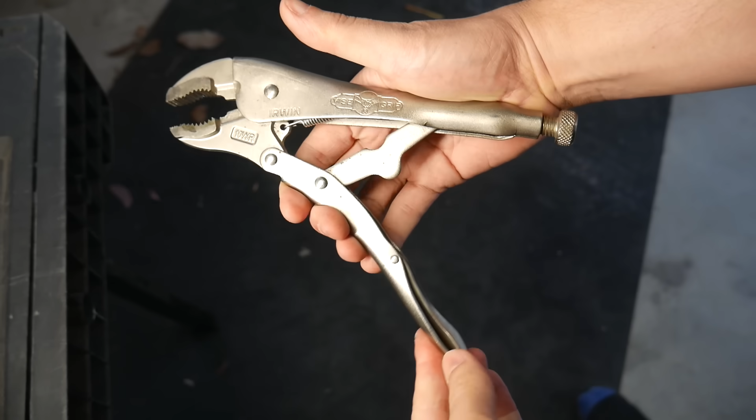I believe that there's one mechanism to rule them all. It's found everywhere in common objects, and today I'm going to show you how you can use it in your own designs to make them better.

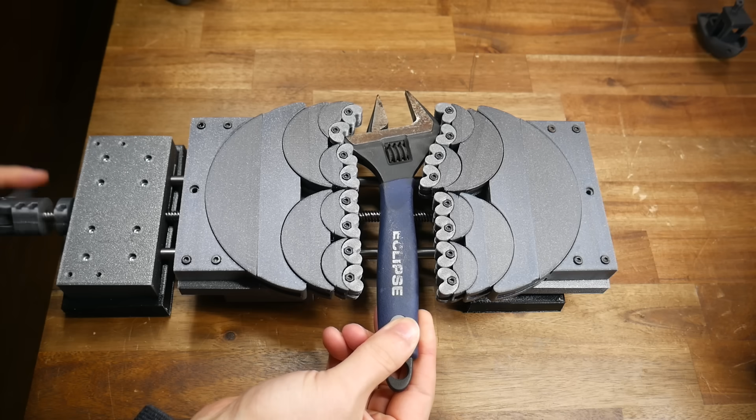Designing and making your own mechanisms can be incredibly satisfying, but understandably, some people might find the process a little too complicated. So today the focus is on designing just one, the over-center mechanism.

We'll look at real-world applications and then work through a series of designed examples so you can learn the critical characteristics. You might not realize it, but over-center mechanisms are all around us in everyday objects.

The most common use you'll probably see are those satisfying snap-to-close latches that hold tool cases shut. But you'll also find over-center at the heart of more complicated mechanisms like Vise-Grips.

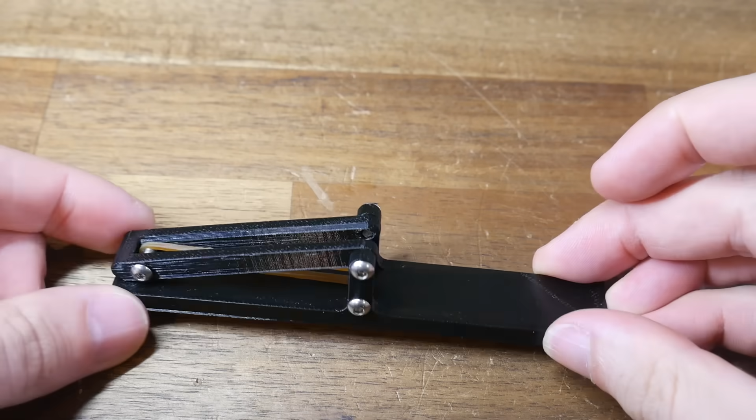To break down exactly how an over-center mechanism works, I've created this very simple version. And like those toolbox latches, this is very satisfying to play with as it snaps into position.

Let's examine the geometry. What you're seeing here is the simplest form of over-center mechanism that I could design. And like the real-world object, you can see that we can animate it and take it through its range of motion. Any of these mechanisms will have three main points that we pivot around, and the relationship between them is what's important here.

For two of these points, the lengths will be the same through the full range of motion. For instance, the highlighted line between this top and bottom pivot point is always going to be 12 millimeters. And the distance between this top and side pivot point is always going to be 45 millimeters.

But the distance between the final two points is going to be variable, and that is the key. We can see in this position it's a little bit over 44 millimeters. But as I start to lift it out of that position, it lengthens to 54.

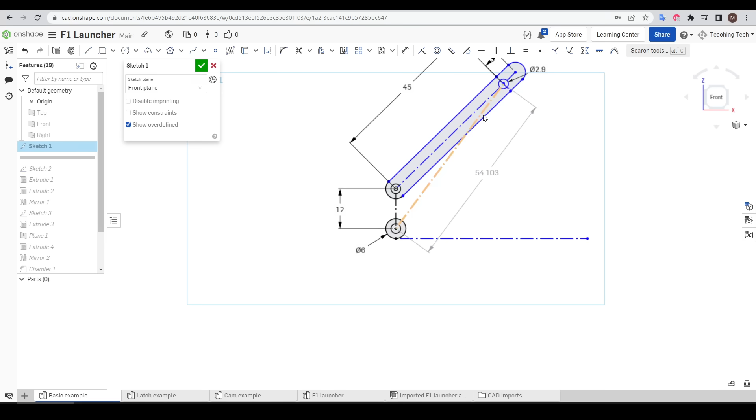At the top it lengthens further to 57, and then as it comes over the other side, we can see it's getting shorter at 55. And then as we bring it down, it gets shorter still, ending up around 44 again.

In real life, if we represent this length with a rubber band or a spring, we can see that as we lift the arm, the rubber band or spring is stretching, is at its highest tension at the top, and therefore if we let it fall at either side, it will want to contract and pull the arm down and lock it into position. And that's the crux of the over-center mechanism.

In the middle of its range of motion, there's a lot of tension or resistance, and the mechanism wants to pull to either side. Despite the name, the mechanism never wants to rest over the center of the movement. In fact, resistance increases as we approach that center point, and that's what makes it so effective as a latch.

It constantly wants to pull itself shut, and we can use these characteristics to our advantage to create very secure locking mechanisms. This is pretty satisfying to play with, and it would probably work well as a switch. But it's still quite simple, so now let's look at a more practical application.

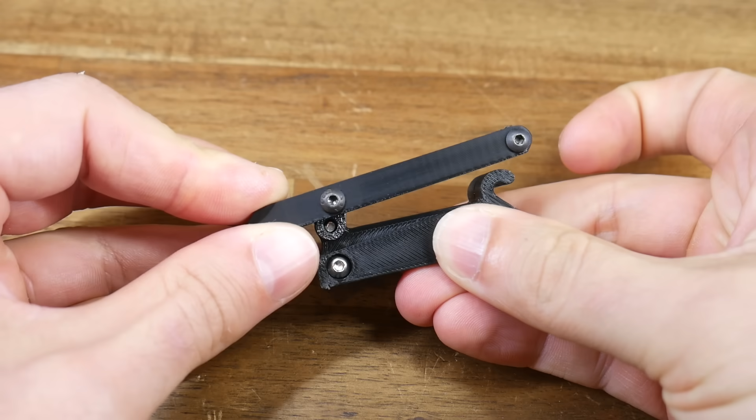Let's move on to an actual locking clasp that you could use to hold two halves of something together. Let's have a look inside the CAD of this example, and once again we have 3 pivot points.

The distance between these 2 upper points will always be the same. The distance between these 2 close points will also always be the same. But this third distance between the 2 furthest apart pivot points is once again going to vary as this arm swings around.

In this lowered position, our latch should remain locked in place, because as soon as we straighten this, we reach the position of most tension, and that's our over-center point.

But if we flip it up far enough, we'll lose tension, and the latch should come free and be able to swing out of this hook to open.

We flesh out the design to make it 3D printable without support, and once it's assembled, we're ready to demonstrate. Keep in mind you would have the hook on a separate part, whereas here I have it all in one piece just to make it easier to display.

In our simple example, the arm that would vary in length was created using a rubber band, which is designed to be elastic without breaking. Therefore, we could print it from any material we wanted as there was minimal stress on the plastic.

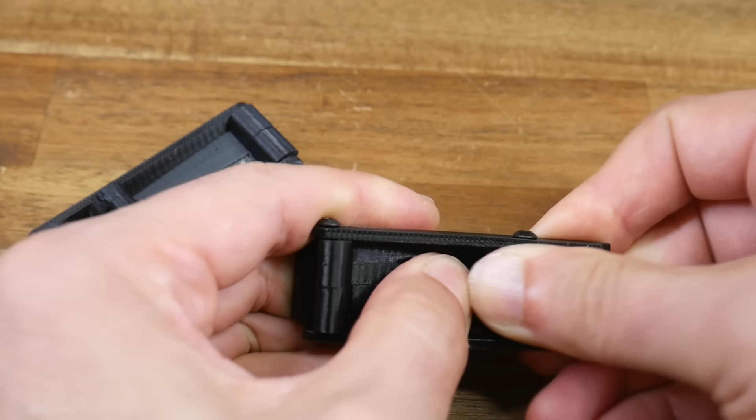This latch example is made from all solid parts, no springs or rubber bands. I printed it in PETG as well as PLA. The PLA version does work, but it's quite a stiff material, and honestly it feels like it's going to break if I use it too many times. Whereas the PETG version has a little more inherent flex, and this tiny bit of elasticity gives it a very tactile motion. If you're designing an over-center mechanism without rubber bands or springs, I recommend PETG.

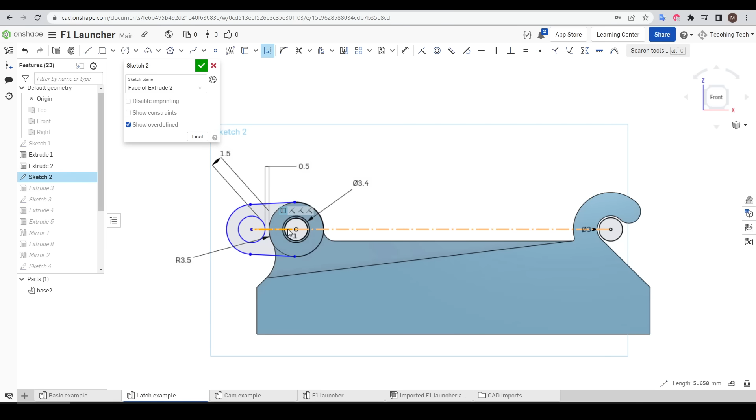Another thing you can do to prevent your printed mechanism from breaking is to keep the distance between the two closest pivot points as short as possible. In its relaxed position we're just under 45mm, but as we move it over center we're just over 45mm, so the plastic component between these two parts doesn't have to stretch very much.

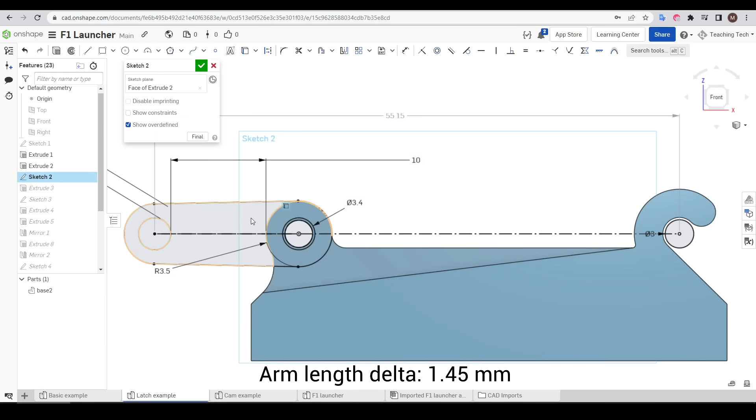Now for fun, let's exaggerate this gap. We can see that at the bottom we're just under 54, and over center we're just over 55. So the more spread out these pivot points are, the more this arm will have to stretch, and the more chance you have of breakage. But if this arm is represented by a spring or rubber band, you can safely ignore this consideration.

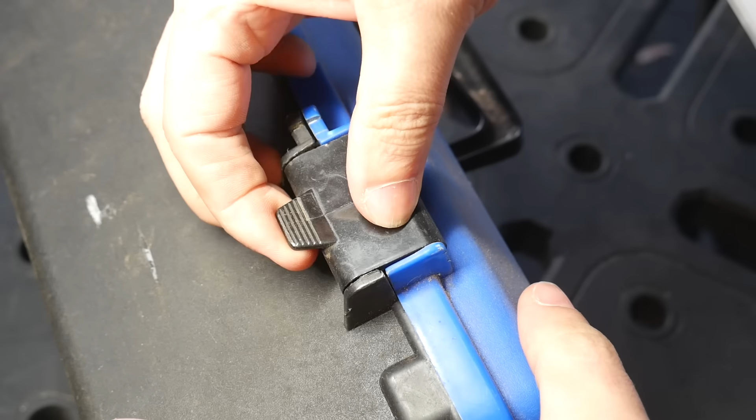Let's recreate another real-world example of a closing latch that wouldn't typically be called over center. In our example so far, as we've traveled over center, we've increased the length and therefore tension in the mechanism. But on this example we instead have compression. We still have an over center point with a lot of pressure, but either side of that point, the latch is happy to snap into position.

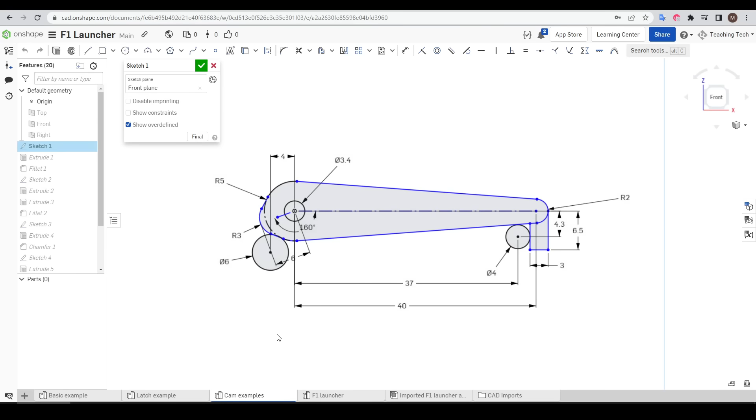There's a couple of ways to achieve this, and the first version uses a cam, which is this raised lobe jutting out on an otherwise circular end. Like our other examples, we still have 3 points, so let's move the sketch and see how this operates.

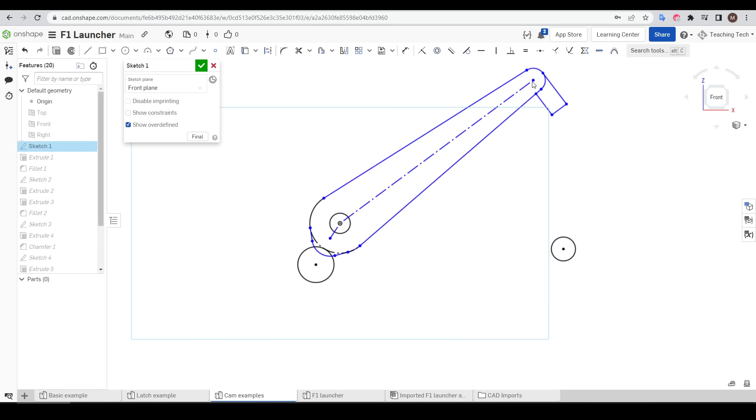At the moment we're relaxed, but as we rotate up, we can see that the cam overlaps with one of the pivot points, adding compression. This position will have the greatest amount of pressure, but either side of that, the mechanism will want to snap to where it can move more freely.

The trouble is, our plastic is solid, therefore I put a little cutout here, hoping it will flex inwards and stop the plastic from breaking. I modeled up a quick base and then hit print, and here is the mechanism assembled.

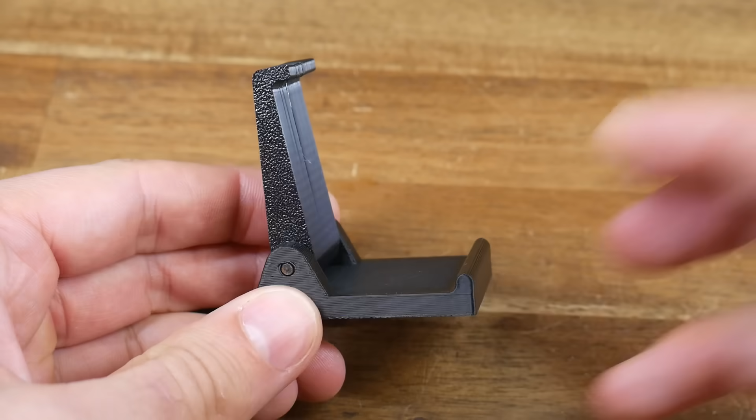We can move freely, but as we push and approach the over center point where the cam is rubbing on the base, pressure builds up until we pass over center and it snaps into position, although it's still a little bit loose for my liking.

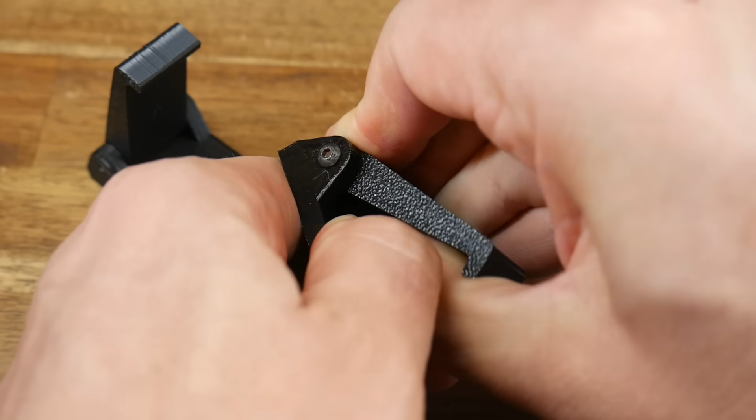That version was in PETG. I also tested this one in PLA, and once again it's much stiffer. So if your mechanism has a cam that adds compression, I wouldn't recommend PLA but rather PETG, as it has more inherent flex.

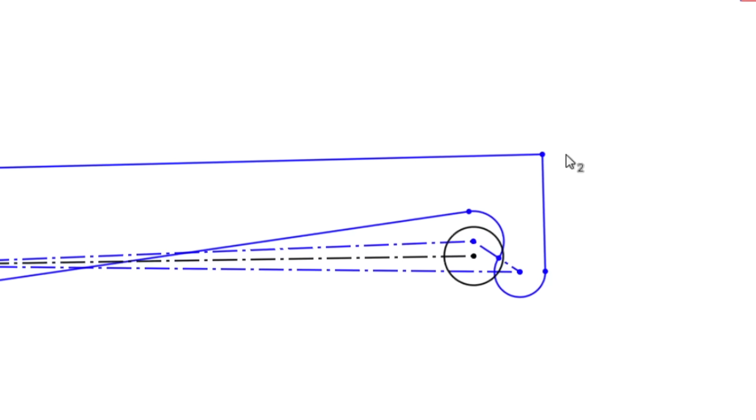As we rotate the arm, we can see that once again we'll have compression between these two pieces. Realistically, this elbow is going to flex to create a larger angle. Maximum pressure will be at the center point, but either side of that, the arm will want to snap to create clearance, whether that's opening upwards, or if we're closing the latch, snapping down to secure everything in place. So similar to an over center mechanism, just not quite the same.

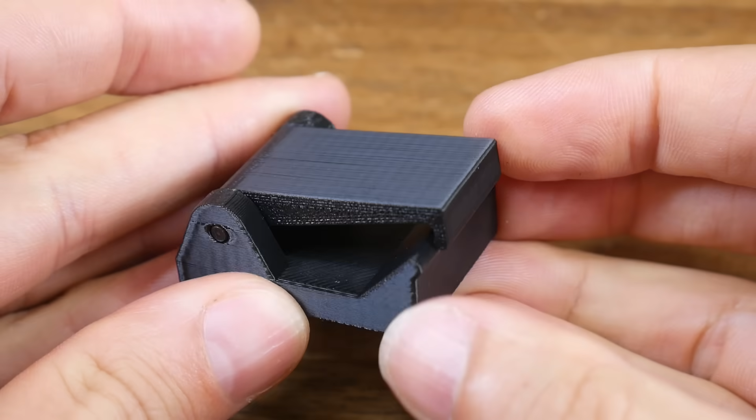And here is our latest latch, printed in PETG and working perfectly. In fact, this one makes a satisfying clicking sound as it snaps into position. Because of the way this latch flexes, it feels like over center, in that there's a high friction point in the middle and then it wants to slip either side. And because this flexing happens over a long distance, I found that PETG or PLA was perfectly suitable for this type of design.

We have some functional designs, but let's finish with a proper project where the key element was an over center mechanism. This is a box of soda bulbs. They're actually carbon dioxide canisters, and I'm sure they're great for making soft drink, but I've never used them for that. Instead, I've used them for rocket propulsion, such as the sequence you see in the intro of my videos, but more significantly in F1 in Schools competition that we had a lot of success with when I was still teaching.

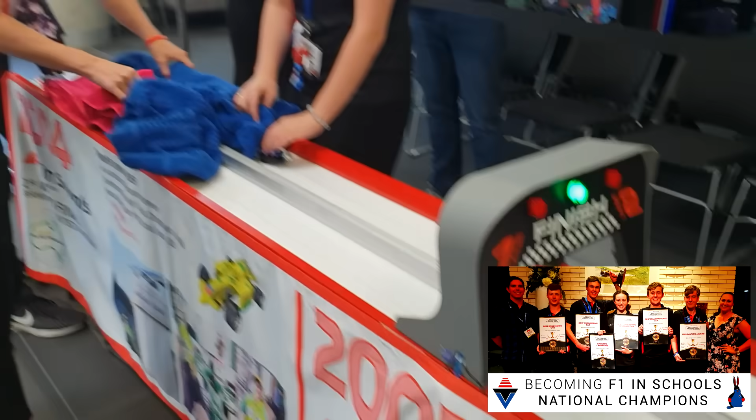To test the cars at school, you need your own track and launch system, but they are so expensive. So I did what many of you would do, and I designed my own from scratch, track and starting system.

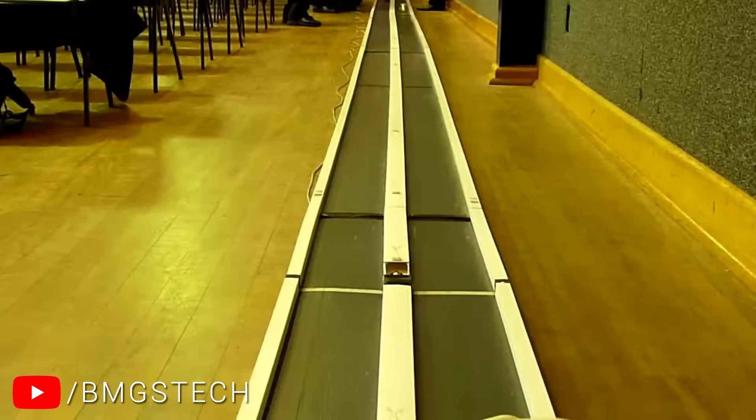Originally, I made the mistake of thinking that the canisters were easy to burst and thought I would employ a solenoid to do just that. But it turned out that the membrane on the back is surprisingly tough, and any attempts to break it with something like a thumbtack will either break the thumbtack or maybe break your fingers.

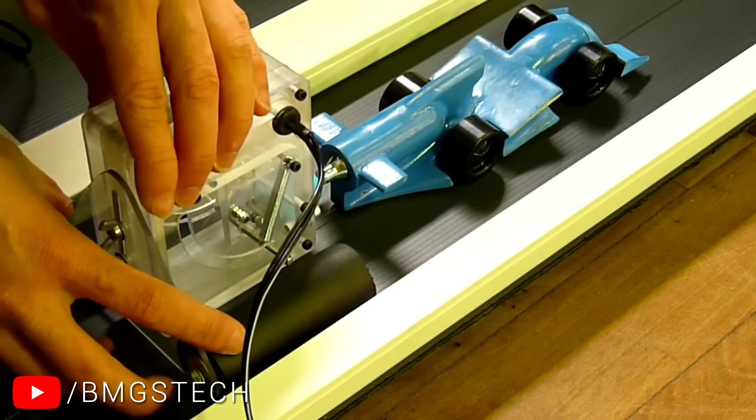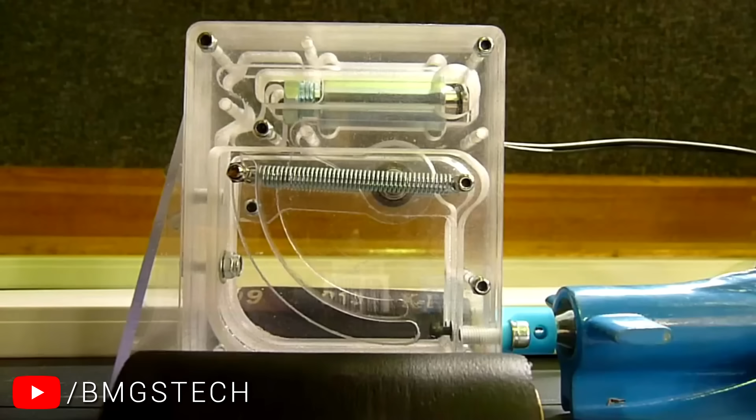The solution turned out to be an over-center mechanism, and a fair amount of people have contacted me over the years since making this video for my school. Sadly, I could never find the source CAD, but I eventually located it when preparing the video you're watching. The original was CNC machined from 12 and 3mm acrylic.

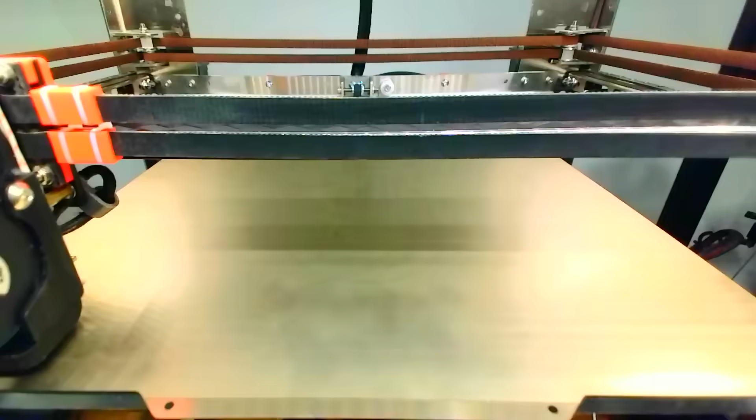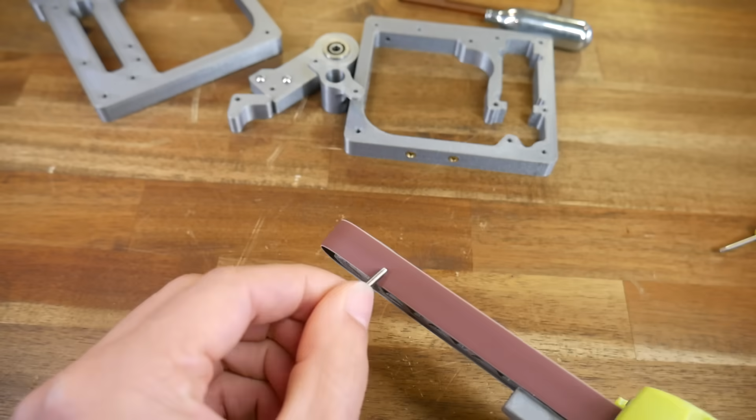This time around, I chose to laser cut 3mm acrylic, in part so we can see the mechanism inside, and the rest I 3D printed, including some new custom parts to replace some of the weaknesses of the original design. If you did want to make your own one of these, I've uploaded all of the files and source CAD to Printables, and I've got an unlisted step-by-step instruction video going through the assembly.

For this video, however, we're going to concentrate on the over-center mechanism, and once again we can see that we have 3 pivot points. Like our simpler examples, the distance between these points follows the same rules. The distance between 2 is fixed, yet the distance where the spring is will vary as we wind back the mechanism.

The over-center position is the position with the most resistance with these types of mechanisms, and from that center point it's desperate to snap closed to either side. Our simplest example from earlier is exactly the same. It wants to be anywhere except perfectly vertical over center.

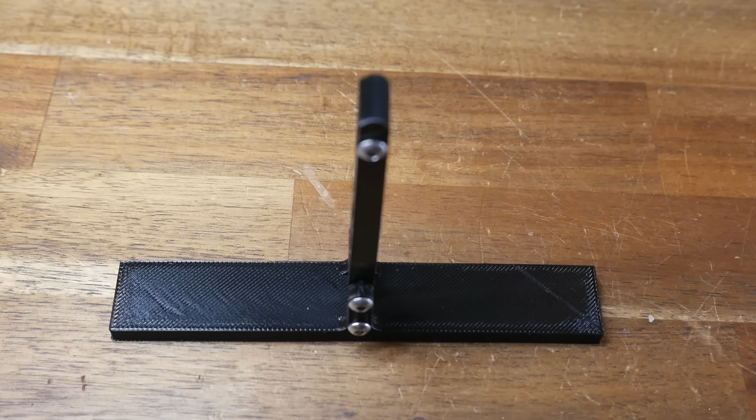If we can balance the arm in that over-center position, all we need to do is blow on it, and that's enough to make it snap in the other direction. That's how this launcher works.

The tension builds and then the stopping point is just past over center. In this state there is a lot of stored energy, and we only need the smallest touch from the solenoid to push it past the over-center tipping point and to snap it down into the firing pin.

Even just tapping the top with my hand is enough to trigger the mechanism, so a relatively weak solenoid can be used with this mechanism to impart quite a bit of force and burst the canister.

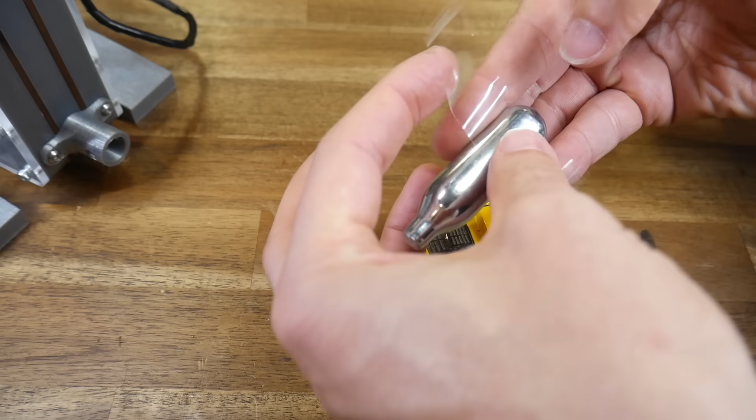I didn't have any dedicated CO2 cars handy, so I had to improvise, getting a matchbox car and strapping the canister on the roof with tape. After an initial false start from the firing pin not being sharpened enough, attempt 2 gave the reliable operation that we used at school for many years, all thanks to an over-center mechanism.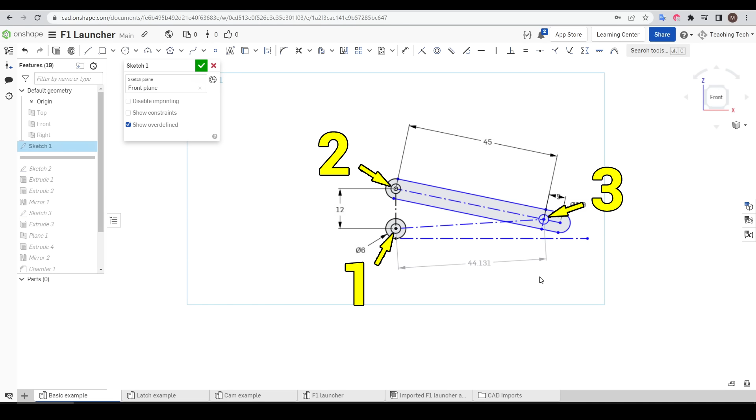Let's quickly summarize for when you're designing. This mechanism has 3 pivot points, which we've seen in each of our examples. If we look at the straight lines between these pivot points, the length of 2 of them will always remain consistent no matter what the mechanism is doing.

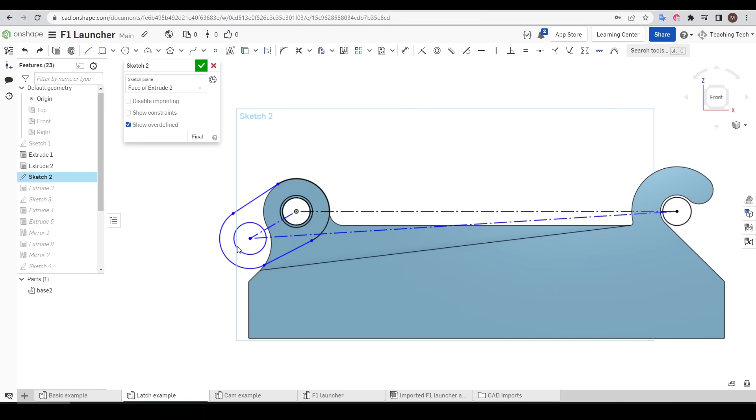But the length of the third will be variable, changing as the mechanism moves through its range of motion. Peak resistance will be when all 3 points are aligned. When the pivot points are arranged in a straight line, this is what we call over center.

And although we can balance the mechanism here, it's in an uneasy state because it has a desire to snap to either side of this over-center point. By understanding and manipulating this, we can create a clasp to lock things in place, or release a lot of potential energy with a tiny push.

Hopefully this video has demonstrated how versatile over-center mechanisms are, as well as the steps you need to design them.